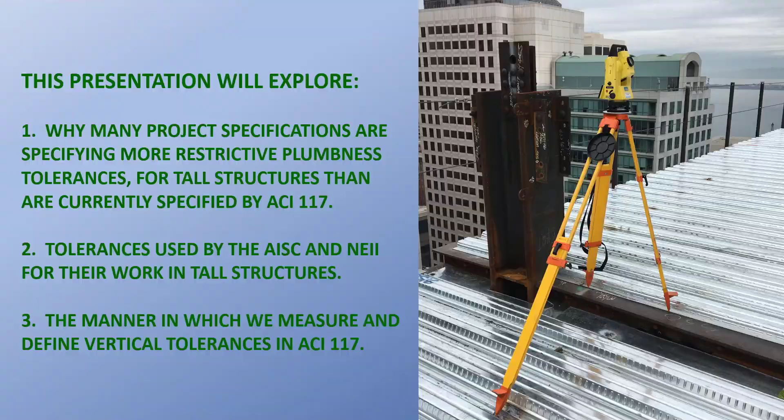And honestly, I remember when I first started that it wasn't uncommon to have a very heavy plumb bob hanging down in the elevator shaft, and that just doesn't happen with total stations and everything else we're using now. Make sure I didn't skip one.

So the way the ACI tolerances work is that from the base of the element, you measure the location relative to the northings and eastings control of the project. And right now, that's the only place you ever measure it. From there, you plumb up from that. You're still referencing building line, but the only place that it says in the specification to measure the horizontal location of a vertical element is at its base.

And in the first 83 feet 4 inches, we have a maximum slope out of plumb of up to 0.3%, okay, or approximately 3/8 of an inch in 10 feet. At 83 feet 4 inches, the maximum we can be out of plumb is 1 inch. And you can get to 1 inch using a 3/8 in 10 slope in 27 feet 9 1/4 inches.

And then for above 83 feet 4 inches, the maximum slope drops down by 3 times to 1/8 in 10, or 0.1%. And then you progress on an envelope that if you multiply that slope out for the difference up to 500 feet, you end up with a maximum out of plumbness of 6 inches.

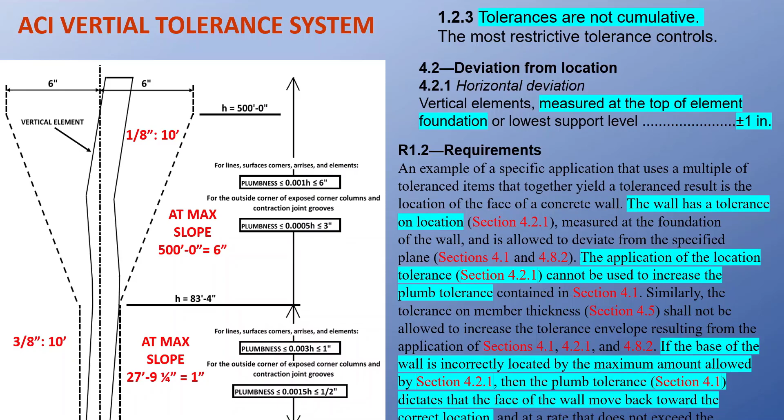AISC has a little bit different tolerance structure. They have an allowance for 1/4 of an inch at the base maximum, but they also have a caveat that they don't really control the base. The anchor rods are put in by somebody else. Wherever that base is, that's where it's going to be. But they do attempt to make the best fit for the structure when they set.

There's always tolerances in bolt holes, and they attempt to make a best fit, but that's their tolerance at the base. They have one slope and one slope only, and that's 1 in 500. That goes all the way up the building. And they have a couple of thresholds where they have to remain within 2 inches inside and 1 inch leaning towards the outside.

So they have an asymmetric envelope. You have more tolerance going in than you have going out, okay? And then once you get up to level 36, you can be as much as 3 inches towards the inside and 2 inches towards the outside, and then that's all you get, okay?

The elevator, NEII, their tolerance is easy to state: up to 100 feet, the sides of the elevator shaft can only encroach 1 inch. From there onwards, you get a 32nd of an inch in 10 feet to continue to migrate outward up to a maximum of 2 inches. 1 inch is the golden rule inside an elevator shaft.

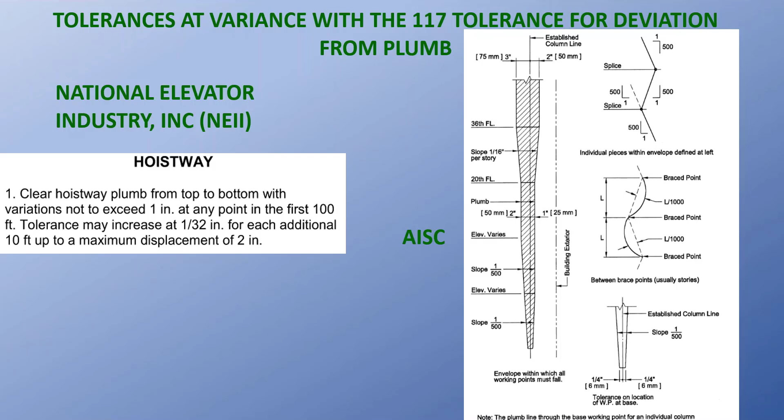So we can already start to see how much we're deviating, how much difference there is between these various tolerances that are being used in structures, tall structures.

So what you're looking at now is a tolerance from a project specification. It's a little bit different than AISC in that it's symmetric, and it prescribes a very definite location of where you can transition from a 1 inch max and start migrating towards a 2 inch max. It has the same constant slope of 1 in 500 or 1/4 of an inch in 10 feet. And the maximum deviation at the very top is 2 inches, either inside or outside.

The same specification provides basically the same requirements for the elevator shaft that I just described, of being allowed to encroach 1 inch on either side, up to a maximum of 2 inches of total encroachment. And then the 1/32nd almost doesn't matter, because you're mostly constrained by the 1 inch that you're allowed to encroach on either side.

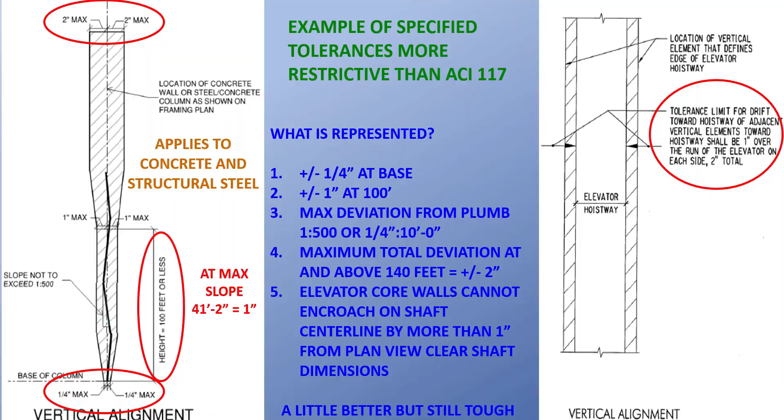So using this tolerance system, I want to just talk a little bit about what it means. This is an elevator shaft located on the 38th level of a building we built. If the core wall is out, whatever amount it is, it's affecting the toilet. This is a code clearance requirement. Now you can see they've provided some furring there. There's a little bit of adjustment, okay?

And it affects this pocket for the door in the lobby, in the fire lobby. And also it can affect this location of this vestibule wall. And a vestibule has to maintain a definite dimension, right? The room in that vestibule is a minimum. It also affects this corridor. If the core is leaning one way or another, it'll affect the minimum width of this corridor.

So the designers are bound by code minimums in many cases, and it's not uncommon to see this many things around a core. In fact, seeing bathrooms next to a core, both in residential and commercial structures, is very common.

The thing is that when we lay out sleeves and things like that, that's all done with a total station now. The mechanical and electrical contractors come out there, they clamp the total station onto a column, and they lay out every sleeve in that building. And they're referencing control, right? They're not referencing walls, and that's not really a good way to build. So we want to have the ability to accommodate tolerances in the sleeves and the furring around these walls. The tolerances that exist must be accommodated.

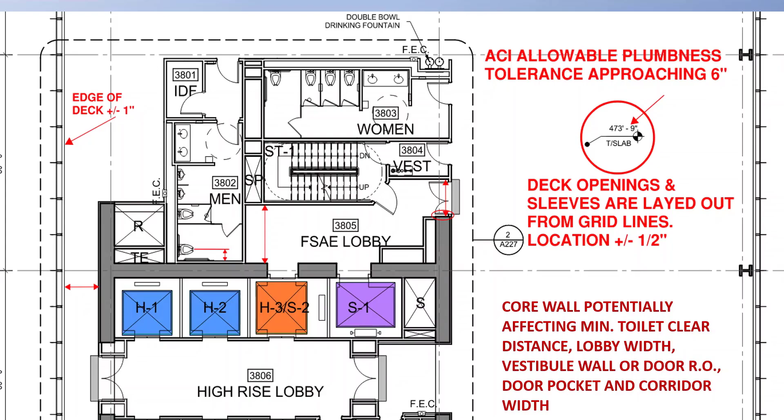So next slide here. This is the red line going around this same core, only this is up at level 40. Right now we're 473 feet above the ground level, so we're very close to the maximum of what ACI would allow of 6 inches. So if we had the 6-inch tolerance, that red line around this core is what the designers would have to provide in order to accommodate a core moving as much as 6 inches at that elevation.

And it's quite significant. You can see that it makes a big difference in terms of what kind of accommodations you have to supply for that toilet room and everything else. It's not an easy thing to do.

Also, a big deal for the owners is that it affects the marketable amount of real estate. When they do their calculation of what real estate they have, they're losing area. And as trivial as that might sound, because it's just this ribbon around the core, it adds up in a tall structure. It's not insignificant. I figured it out. It ends up being a sizable space, maybe the space we're sitting in right here, by the time you get to the top of the building.

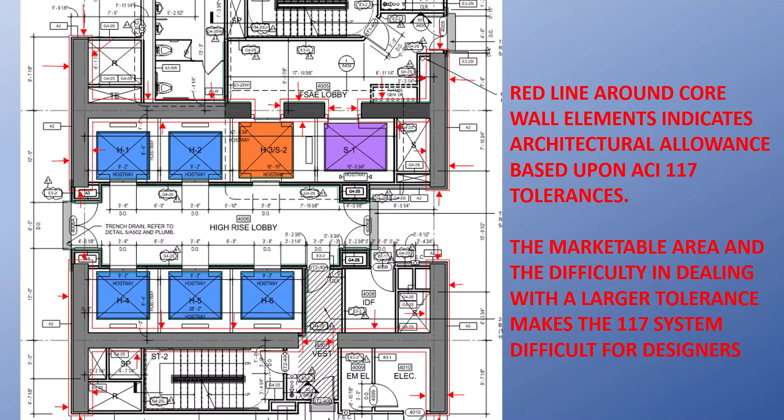This is another standard that was in a specification, and this is one we were fortunately able to negotiate.

This one had a 3/8 and 10 with a maximum in 20 feet of 3/4 of an inch, and then from 83 foot 4 inches and more. In other words, all the way to the top, they wanted us to stay within 1 inch. And I don't know how many people here that build would be happy about signing a contract with that kind of tolerance in it, but that's what they require.

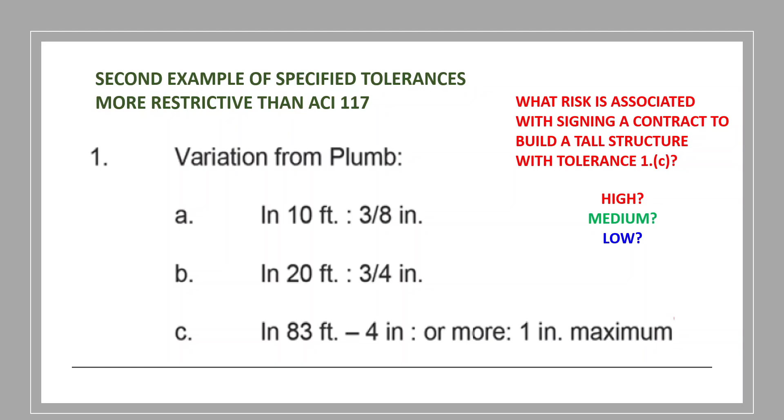We didn't. We went through the drawings. We discussed this with the engineer in our pre-job meetings. Even though they had that 1 inch tolerance, we were able to find a number of locations where they hadn't accommodated the tolerance. So I'd just like to make that a kind of a lesson there. You need to look and make sure that even though the structure you're building has tolerances, you want to know that the architectural details actually accommodate those tolerances. How are they going to adjust for them?

Right here, for example, that column is next to a kitchen that has overhead cabinets. I mean, they don't have any room there. There just isn't any room. And same thing with their toilets and things like that. So what we basically got them to was more or less a tolerance which was similar to the one that I just showed you of the 2-inch maximum, with one exception. We could only figure out how to get 1 5/8 tolerance with the architectural details that they had to accommodate.

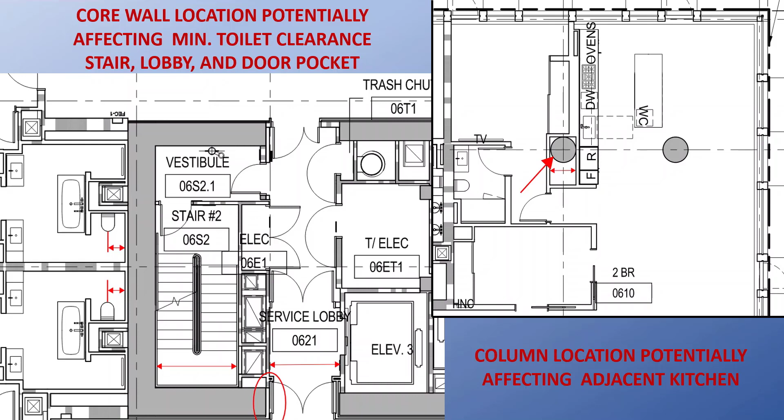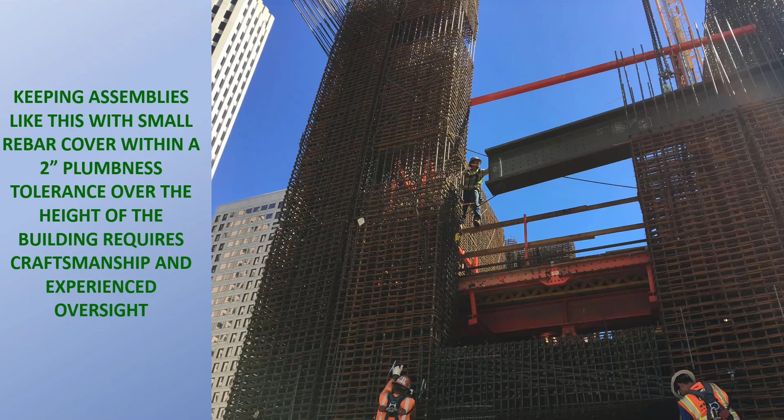So there they're putting in a coupling beam. In this case, they're using a structural steel coupling beam. And again, like I said, it takes craftsmanship and experienced oversight. You just can't sit back and think that this is going to happen by itself.

This is the same building, and because of the tolerances, they're surveying these buildings. If we're responsible for something, if steel has to be modified, if architectural details have to be modified, they're coming back to the contractor. And that's just the way it is, right? So they measured this building all the way up. Our maximum deviation on this building was 1 3/8". I don't remember exactly which level it occurred, but on this level here, you can see that our maximum at level 46 was 1.25".

So the reasons we're trying to maintain these tolerances are, one, as I just mentioned, the marketable area, the fit up of adjoining elements, and simpler connections: accommodating smaller deviations is simpler than accommodating large deviations.

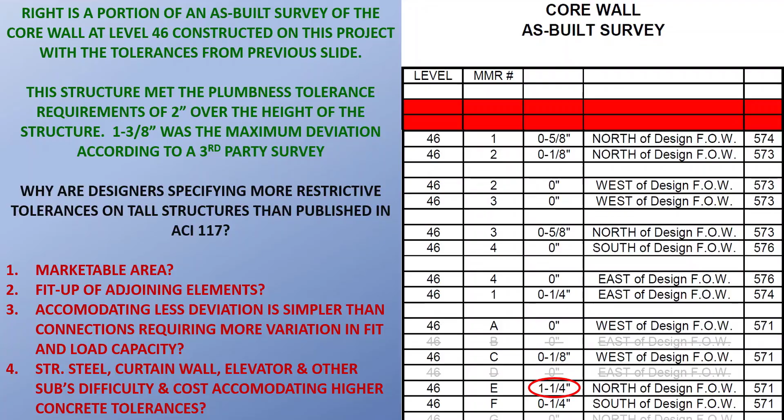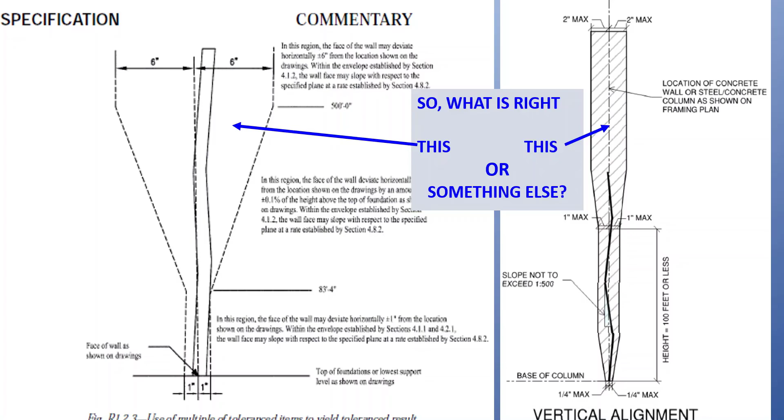So my question in this presentation is, what's right? Should ACI just keep going with this tolerance envelope on vertical elements? Because very few of the designers like it on tall structures, and they almost inevitably will specify something more stringent. If we specify our own tolerances that are based more on consensus, then we can defend them. For example, if we wanted to say 3 inches both ways, and we have people from NEII, AISC, window wall people, and others affected by this saying they can accommodate it, we decide that 3 inches is the number. Hitting 2 inches is not easy on a tall structure.

And I think they build similar structures to us, and I think he'll nod his head saying that doesn't happen by itself. It's very difficult. It's very difficult to be contractually tied to. So the reason I'm giving this is I think that we should reconsider our tolerances so that we have this within our control and not get told on every job what our vertical envelope is. I would like to have some control over what it is we can do and then be able to represent that with some consensus for people within our industry at large.

This is just what I wanted to talk about in terms of how we measure tolerances. This is a pre-pour scan that I did. I'm looking at the rebar cage. Again, if you don't control the rebar, you don't control the surface of the concrete. I'm noticing that this column is eccentric. It's got an 1 1/16" clearance at the top from its model location, and 4 1/8 inches there.

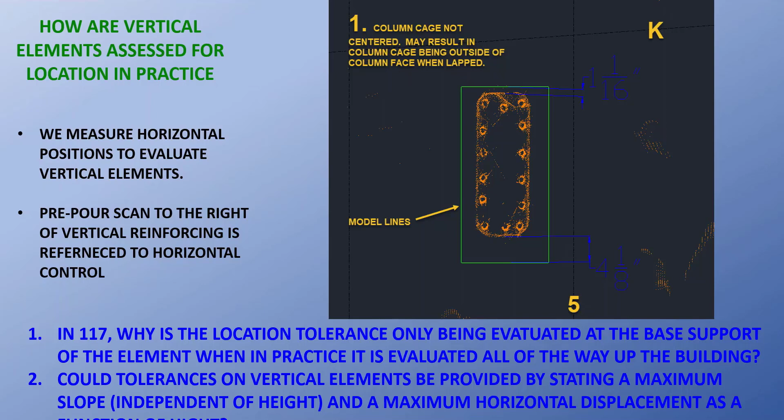We could state the tolerances on vertical elements to be provided by stating a maximum slope, independent of height, above the ground level, and a maximum horizontal displacement as a function of height. Just a different way of writing it, of phrasing it, because we in fact measure them that way. We don't measure them using a plumb bob.

So this is my concluding slide. As it exists now, designers are specifying tolerances more restrictive than ACI 117 specifies for plumbness on tall structures. Building architectural layouts are not assuming the ACI tolerances. You look at what they've designed, where they're allowing clearances, there's no way they're accommodating 6 inches of movement on tall structures. It would be very difficult for them to do.

It becomes very difficult if you have a core wall that's supporting structural steel and it's extending out to the curtain wall, and they have to make that much of an adjustment in their clip connection, their shear tabs out of the exterior columns. That creates a lot of additional stresses. I mean, it's structurally difficult to have a larger connection that they have to make.

There's an inconsistency between AISC and ACI plumbness. Our tolerance structures are not the same at all. They are inevitably going to clash. There's no way that those two tolerance systems work together because they don't have the same slopes, they don't have the same values. We are fundamentally set up to have a conflict with the steel.

And there's this thought that maybe we're starting to constrain ourselves by publishing a tighter tolerance system, but I'm thinking that we're getting constrained anyway, and I would like to have some control over that constraint. So that's the reason for this presentation. This actually was going to be given a couple of years ago before COVID, and it's an outcome from a presentation I actually gave at a 117 meeting that they thought I should share with a larger audience.